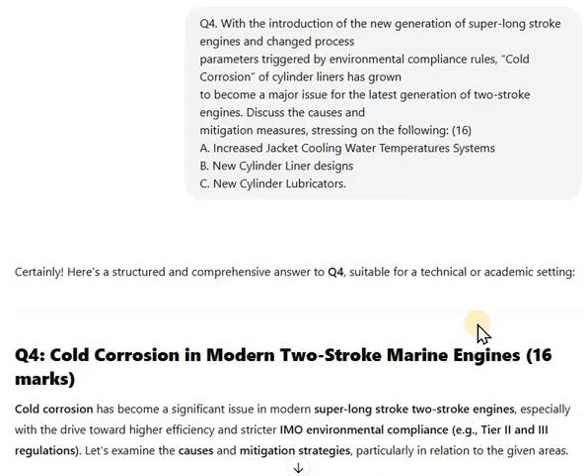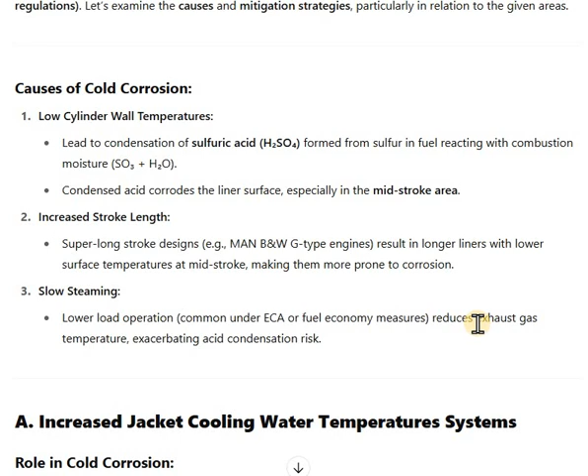Cold corrosion has become a significant issue in the modern super long stroke two stroke engines, especially with the drive towards higher efficiency and stricter IMO compliance, that is the Tier 2, Tier 3 regulations. So, causes of the cold corrosion: low cylinder wall temperatures leads to condensation of sulfuric acid formed from the sulfur in the fuel reacting with the combustion moisture, forming SO3 and water. Condensed acid corrodes the liner surface, especially in the mid-stroke area.

So, in the super long stroke cylinders, the mid-stroke area of this cylinder liner has the tendency of cold corrosion happening. That is basically the condensate and the sulfuric acid from the fuel reacting, leading to the surface area corrosions.

Increased stroke length. Super long stroke engines result in a longer liner with lower temperatures being formed at the centermost point, and this results in condensate of the combustion reacting with the sulfuric acid, the sulfur coming from the bunkers, that is HFO, and both of them reacting, resulting in cold corrosion, which is happening there at the mid-stroke length of the cylinder liner.

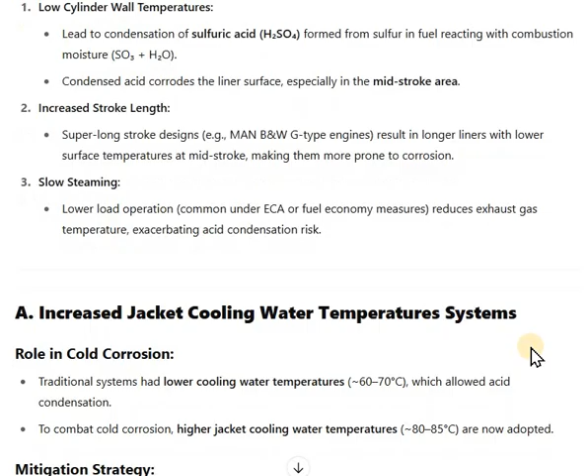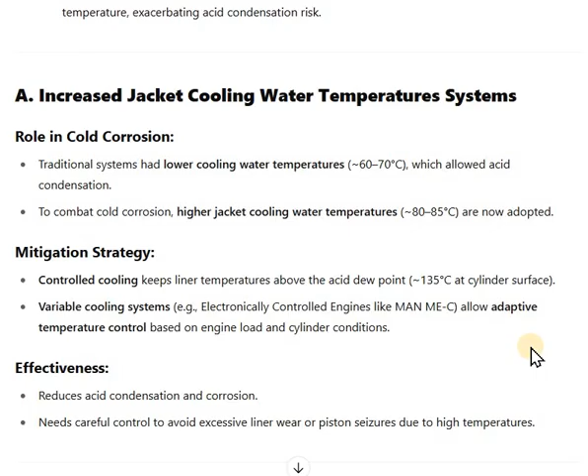Slow steaming, lower load operations reduces exhaust gas temperatures, exacerbating acid condensation risk. So the three reasons here are low cylinder wall temperatures, increased long stroke engines, and also the slow steaming. A, increased jacket water temperature system. What action is being taken here against cold corrosion? Traditionally, the lower cooling water temperatures used to be around 60 to 70 degrees Celsius, which have now been increased to 80 to 85 degrees Celsius.

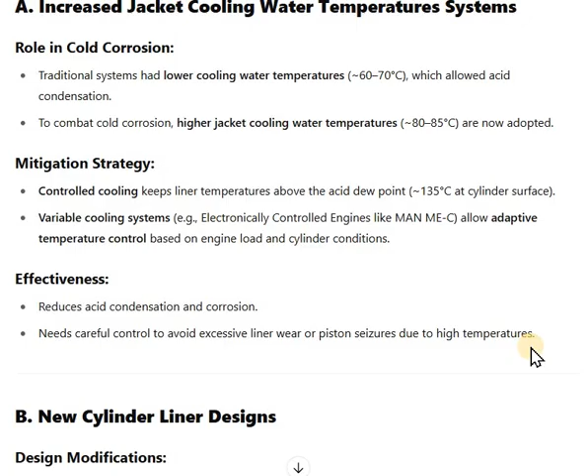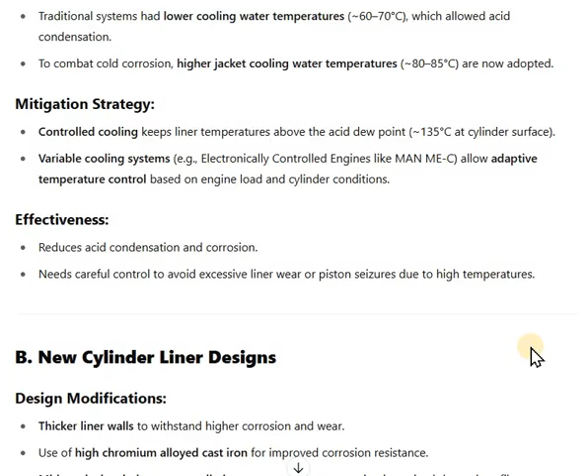Mitigation strategies: controlled cooling system keeps the liner temperatures above the acid dew point, which is 135 degrees at cylinder surface. Okay. So variable cooling system allows adaptive temperature control based on engine load and cylinder conditions. Effectiveness: reduces acid condensation and corrosion. Needs careful control to avoid excessive liner wear or piston seizure due to higher temperatures.

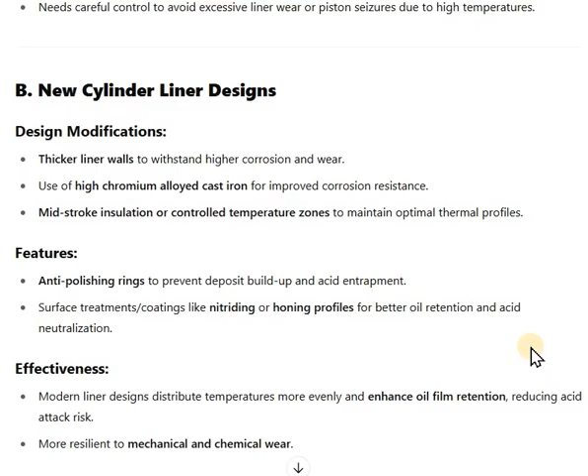New cylinder liner design: thicker liner wall to withstand higher corrosion wear. Use of high chromium alloyed cast iron for improving corrosion resistance. Mid-stroke insulation or controlled temperature zones to maintain optimal thermal profile. Features: anti-polishing rings to prevent deposits build-up and acid entrapment. Surface treatment coating like nitriding or honing profiles for better oil retention and acid neutralization. So these points are quite important.

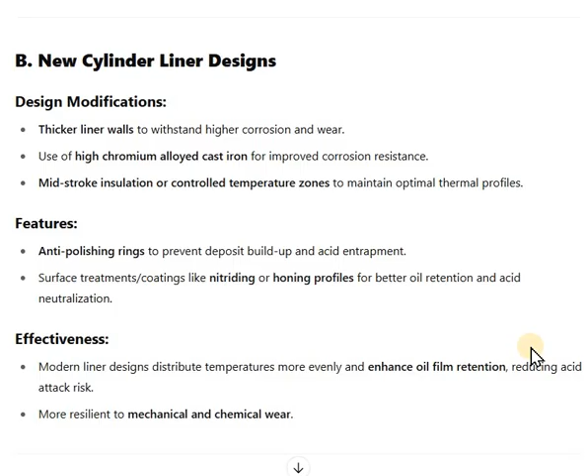The design modifications are the thicker liner walls, which can withstand corrosion and wear. The higher amount of chromium that has been alloyed in cast iron to improve the corrosion resistance. Mid-stroke insulation and controlled temperature zones to maintain optimal thermal profiles. And also the features that have been incorporated are the anti-polishing rings to prevent deposits build-up and acid entrapment, surface treatment coating like nitriding and honing profiles for better oil retention and acid neutralization.

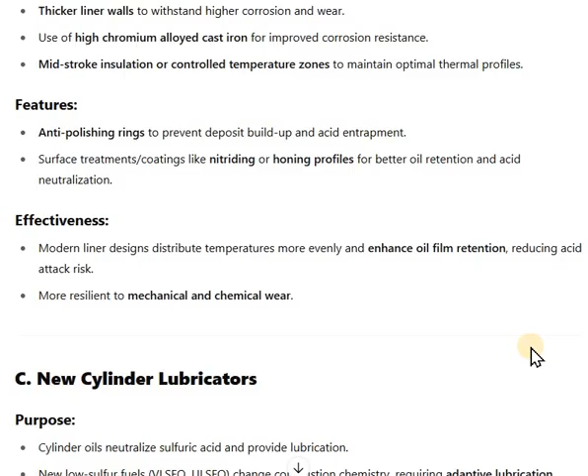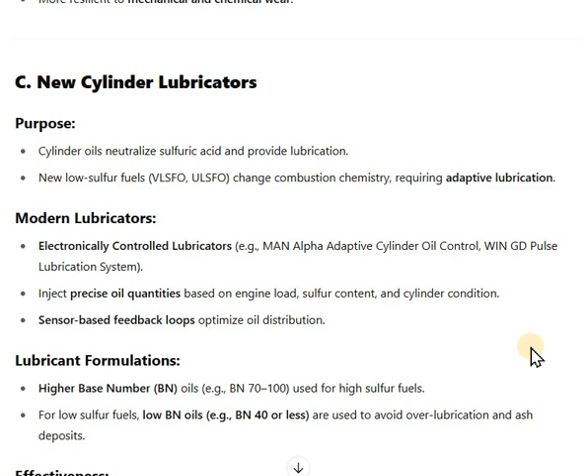Effectiveness: modern liner designs distribute temperatures more evenly and enhance oil film retention, reducing acid attack risk. More resilient to mechanical and chemical wear. Now, with the cylinder lubricators, purpose is cylinder oil neutralizes sulfuric acid and provides lubrication. New low sulfur fuel changed combustion chemistry entirely, requiring adaptive lubrication. Modern lubricators, electronically controlled lubricators, inject precise oil based on the engine load, sulfur content, and condition of the cylinder. Sensor based feedback loop optimizes oil distribution.

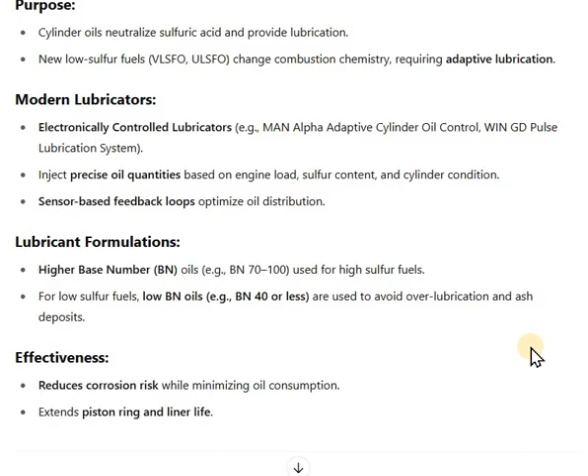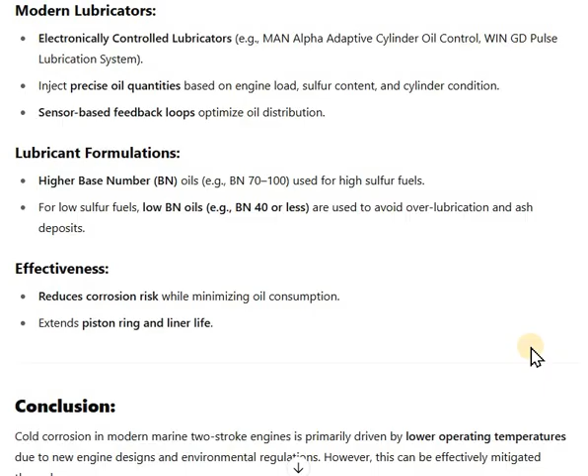Lubricant formulation: earlier it used to be a higher BN number, that is 70 to 100, used in higher sulfur fuels, and presently with the lower sulfur fuels, BN of 40 or less is effectively being used. So effectiveness: reduces corrosion risk while minimizing oil consumption, extends piston ring and liner life.

And the conclusion that can be drawn here is the cold corrosion in a modern marine two-stroke engine is primarily driven by the low operating temperatures due to new engine designs and environmental regulations. However, this can effectively be mitigated through higher jacket cooling water temperatures to prevent acid condensation, advanced cylinder liner designs that resist corrosion and retain lubrication, smart lubricators and optimized oils that provide just the right level of acid neutralization. Proper balance and integration of these measures are key to long-term engine reliability and compliance.